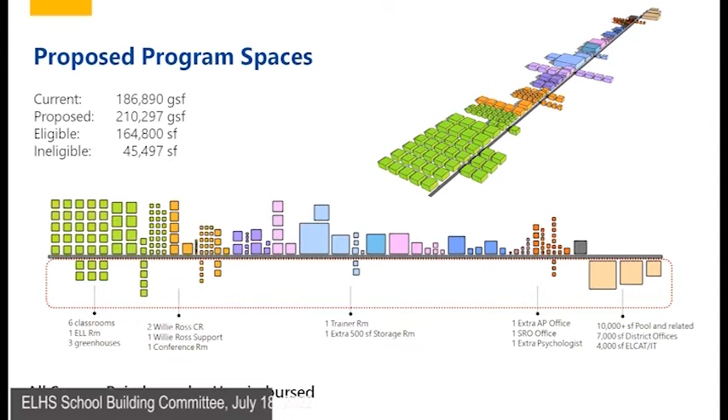And I did realize I missed, we also added a tiny bit to the dining program to allow for a scramble servery, which is a more flexible eating option for students. It tends to engage students in eating more, more people participate in the lunch program if you go with that design. They can kind of move around, it's more their choice.

I think that's what, I don't know about your kids, but my daughter kind of missed that, because she only had it freshman year, being able to go and do the salad bar, kind of have it be more than a la carte. Student-centered dining.

So on the next page, this is not the process of estimating here, this is a process of helping people understand why these numbers matter. So we've circled some of the things that they're probably going to ask us questions about, on the next slide.

So greenhouses we'll probably discuss further. The Willie Ross program, we just need to explain that program. Then there's that question about what to do with the auditorium program. We're looking for feedback from the leadership team on that, and from you all, and they'll shuttle too.

There's the ELCAT studio idea, which we want confirmation is a direction you'd like us to go, to extend the ELCAT programming space so that it's one of the labs, a way to bring it into the academic portion, which might be more reimbursable, but also still have the community aspect of ELCAT.

I think with the way the future's going, like social media and how people create their businesses, drive their businesses, drive their hobbies, drive everything we do, it's all based on media. I don't think it's a bad thing to incorporate it, everything from doing it properly so you don't find yourself in jail, up to being really creative. Our marketing classes need to do more with it, so I think that's an easy avenue for marketing and advertising education. They have entire programs in colleges now for it.

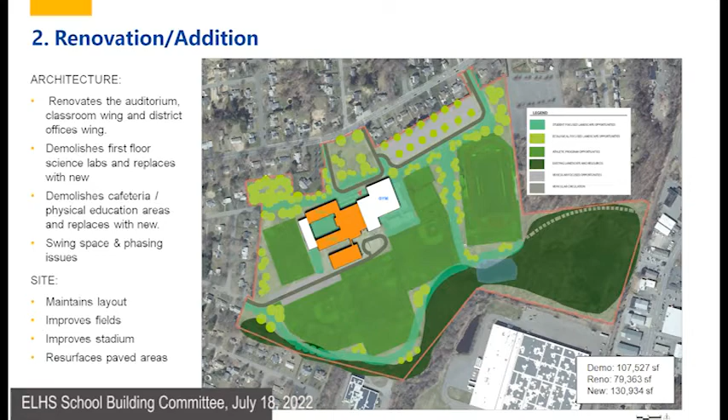As we move forward, are we able to work with the DPW to say we may need better traffic control in terms of lights? Is that something we're obligated as a part of this to do, a traffic study that will look more closely at the specific feeders into the school? And that will eliminate those types of issues, yeah.

So this is new. From our last meeting, we kind of had two areas that we focused on for the new construction. We're calling them the center of the site and the south of the site. So this afternoon, we're presenting two options for the center and two options for the south.

This is kind of the first option for the center. As you can see, it's in an L shape, and a large part of that is so we're around the existing building. It's not shown here, but we basically avoid the footprint of the existing building entirely with this approach. A new main entry, our pods, our classroom wings oriented east-west, again capitalizing on north and south light as much as possible. Gym and pool to the north.

We don't really get into detail here, but we've explored it in a fair amount of detail within the office and then turned that off so as not to distract you and get buried in the details. But we have included square footage for district offices on the north side of that gym pod, closer to the parking, and a two-story classroom wing to the south.

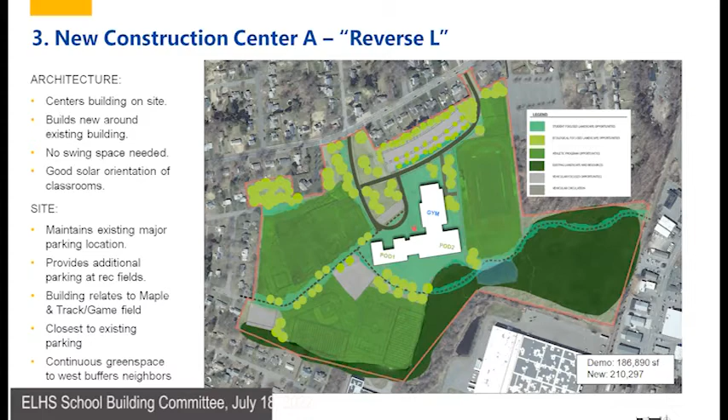On the buses, we have the mini buses coming out for Norden currently, but not for the big buses. We do have staff coming through, with about 10% of staff saying they'd park in the back, though it's very tight and cars fly through there. The challenge we have is meeting both the desire for separation while also having our larger buses going through Marshall. Only the smaller buses come behind the school.

So this is another option, again on the center of the site, avoiding the existing footprint of the building. Comparing option 3 versus option 4, this one is a little bit leggier with more exterior envelope, so maybe a bit more expensive, but it affords a really nice open outdoor courtyard between the school and the existing stadium. We're trying to get the classrooms as close as we can to south and north orientation, breaking up the mass a little more. Otherwise it's fairly similar to the previous option.

Is the parking on the bottom left where Norden comes in? No, not there, the lower one, yes exactly, that's the parking. It would support similar to what's happening along that road now, but gravel there, pulling it together into one spot.

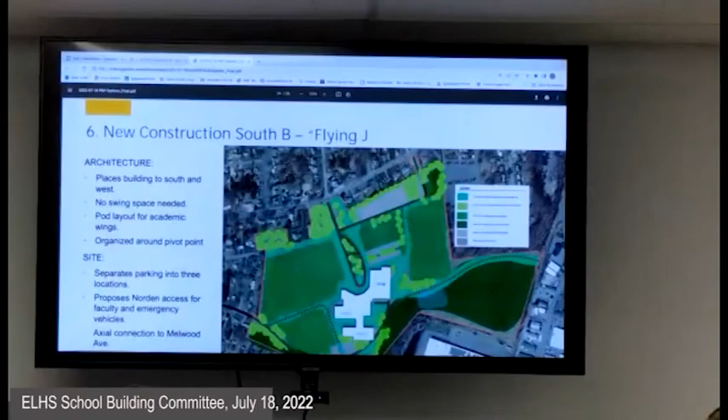I like, yeah. Now, may I ask a question, so up here, right, if that's sort of the central office, could that, if we're thinking community, also be a space for rec?

The rec department? You're talking about potentially bringing that program over here. Not the full thing, well, just possibly. I think we're going way too far in that. I would say a satellite office, but that's a big square footage.

We can't just- hey, what, five people? How many people in rec? Four? Two, three, four. I mean, then you solve access, communication, you solve a lot of.

No, I know, and I understand that, and the usage is important. Right, but I think we're adding square footage that we don't get any reimbursement for. True, so but it solves the space issue because you're opening up. Turn your speakers up too.

You know what I'm saying? Yeah, no, it's a total add-on on top, so I guess what it costs is, I understand. But- $10 million. But does it help the town? We gotta pass this building first.

No, I had thought of that too though, Greg. I had thought of, well, if you put the central office as a rec and community building, ELCAT all together, it almost solves it. It solves a space issue for the town hall, because it opens up space.

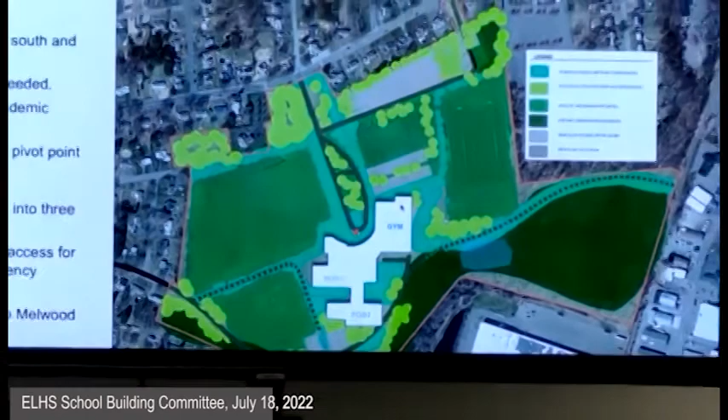So in this plan, is that parking lot where the existing parking lot is? Is that expected for where the students are gonna be, and then they walk up from there? Generally speaking, that was our first thought here, is that students can be asked to walk a little farther than the faculty, rank having its privileges.

No, I understand that. Do you have faculty parking here? So you have two parking spaces, one to the south and one directly to the north. I believe Eric might be able to tell us the counts, but I'm guessing that's probably 200 parking spaces there based on my conversations with Sam, to the one right above.

Eric, do you have a rough idea of these? These aren't finished, but the idea is there's a pretty solid amount of parking there. If we flipped that—and I know these are just preliminary—if we almost move that parking up, as much as I hate to say, where the tennis courts are, and put the tennis courts and the basketball and everything into that back where the arrow is now, would that be neater, cleaner, less kids walking and making paths?

You'd rather bring more parking down and double up some of your lots so you have students and staff right next to each other? Yeah, but then you'd have fields by where those homes are on Maple Street. I'm just thinking it's all in one place.

What costs are gonna get there too, though, because now we're changing the existing parking lot. This has our existing parking lot. It did sound like you needed to do that anyway—there was a capital plan that you needed to change all the drainage on that.

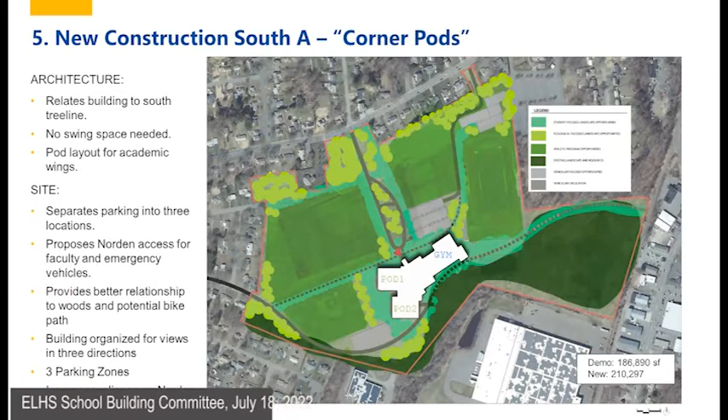Does it? One thing, this one kind of divides the green space up a bit more rather than keeping it all on one side, which is a positive or negative depending on how you look at it. But this gives you a view of the whole campus on the approach. I know a lot of visiting people just can't find anything if they're trying to get to the back office. So this gives you a view of everything as you're approaching, which is nice.

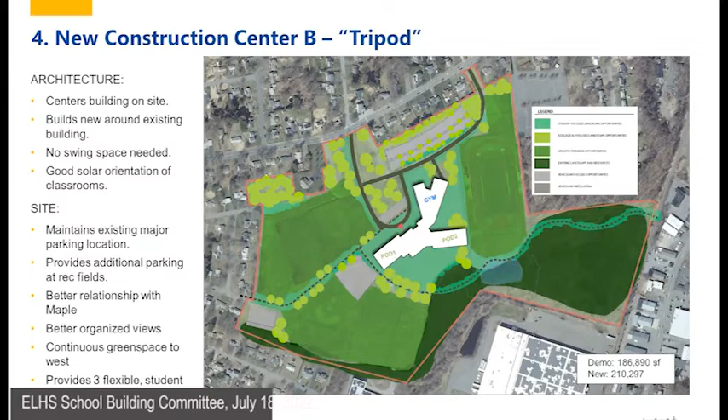What I said to Dory when I saw these two, I said this is the school in the park, because you do have the scope of the site, there's kind of an arrival and a transition.

We definitely want to try and capitalize on the existing large trees near the main entry off of Maple Street, and then some of these are new planting trees. Is that one over by the pool in this plan at all?

That's like one of my favorites. That tree's just like, the rock maple. I was gonna say, if one tree could get saved, there's a big rock maple there, next to the tennis courts. Is that there or is it gone? It's okay if it's gotta go. He said it's staying. That's like the coolest tree, it's like our only shade tree.

Taking notes, Eric. Which one is that, the one by the tennis courts or the one by the bike rack? You know what, it dumps leaves on the tennis courts. It's fine, it's a big one. Now we're getting into the details by the tennis courts. It's okay, that's the least of our problems.

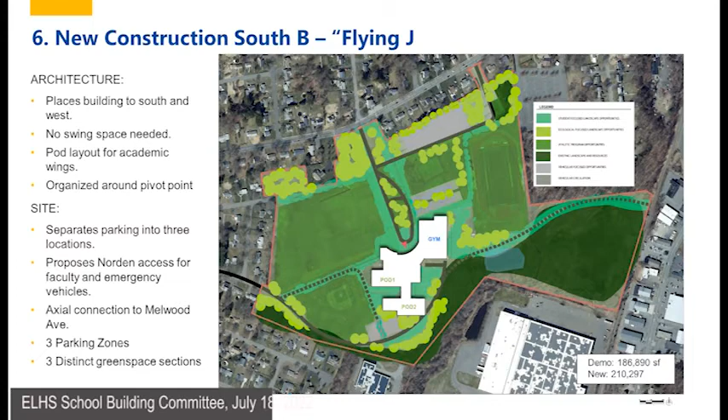She's got a quiz coming up. Here we go, oh nope, there's one more, one more, yeah, seven, go up?

Laps, sauna, nice locker room. A bird's moving in. I got this.

I understand it, but I don't think the pool has to be attached. We have enough trouble getting our students to swim during class, and now you're asking them to walk across. I like the idea, but I don't think it's practical. Even just for wayfinding, trying to find central office, they pull up to the front, now you're gonna have to tell them it's the building way over there.

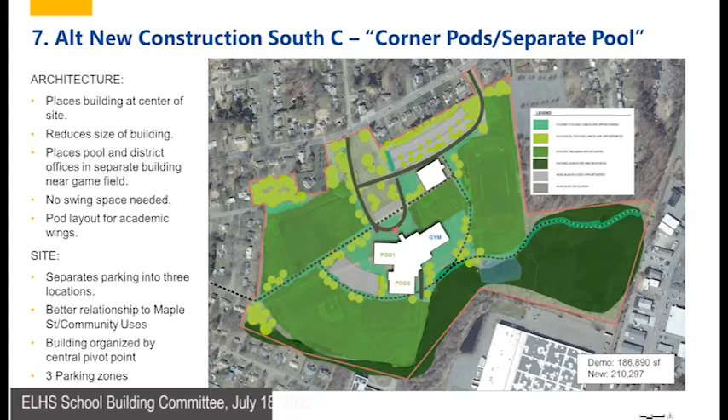They're right next to us in the parking lot. Well, when they come to us first, you have to tell them to go to the high school, which is over there, unless they want to swim. I think the pool park situation needs explaining. All right, next slide.

Everyone wants a health spa, just trying to stay healthy. All I want is a window. You can be up there with the pool.

This is kind of a key that I probably should have placed a little earlier, but just to help you understand why those different greens and what they represent. So the dark green represents the existing landscape resource and more natural areas, versus the athletic program spaces, versus what we think of as ecologically infused landscape around the school, doing healthy things throughout the parking and areas like that, and then student-focused landscapes. We look at these and see which has more opportunities for that.

The center building concepts create more opportunities for space right around the school, potentially, but putting it further south connects to the rail trail and some of that woodland, which is an interesting potential gesture that hasn't been here historically. That could be really interesting. So that was just to share some of that so you understood it.

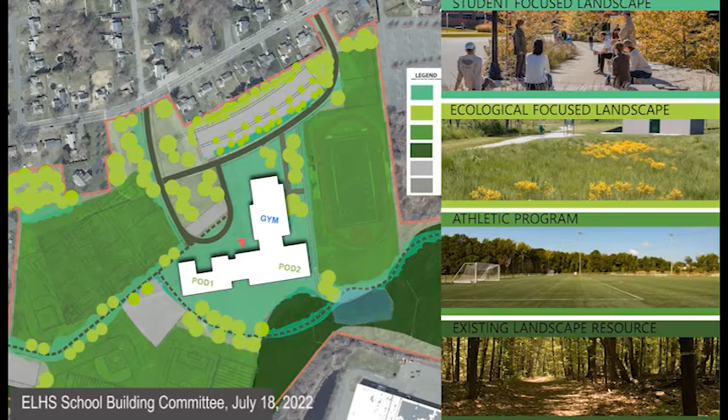We tried not to get over obsessed with confirming routes here, but we were trying to think about the district asking for this separation of traffic, and to the degree possible without making these connections to the community too much of a problem. So this was, to some degree, based on what we're hearing, so we can try and reorient a little bit.

What is each color? I believe the orange was intended to be the bus loop, correct Eric? And the blue is the student loop.

So this one, buses are way up. Yeah, because there's no connection off to the residential. So that avoids that altogether, but it doesn't solve the current situation - it's meant to be quite similar to what we have already in some ways. You still have to route your smaller buses in here.

Well, I think potentially with the entrance/exit being one on Maple, we can put a light there that functions in and out properly, and that would be very advantageous. I don't know if there's room to get a third lane in for a left-hand turn, but that's definitely something that's gonna be needed.

If we can cut into our own space, that would be ideal. I don't know that we can get it. That to me is like one of the biggest things - it sounds stupid, but it's one of the biggest things.

When we transition to this, I honestly don't know how we've never lost a child crossing at that light. I'm proud of every one of them that has survived, because it's difficult - you're coming, there's the turn, these people are coming this way. Just a proper situation there, however you manage it, would be lovely.

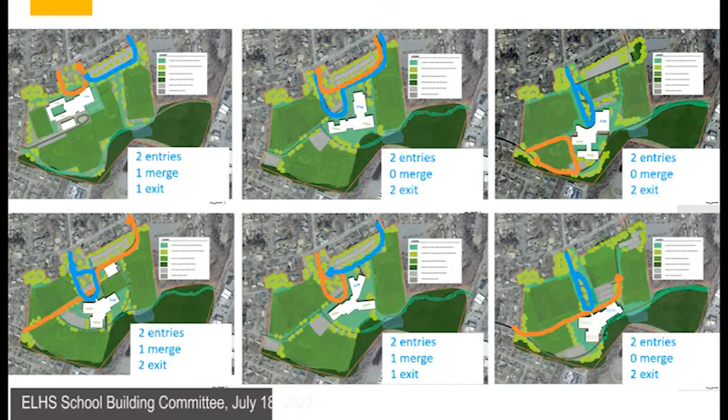Yeah, they come through Norden now, even large ones - our food trucks, all our IT deliveries, waste. That way they don't get caught in the bus traffic, but they don't have to. I like the idea of them not driving around the whole building, which none of them are recommending, I think.

I agree, it depends on when they're coming - you don't want those guys. So that's fine, if it makes sense to come off Norden, then we should do it. Timing wise, you can make that happen. Sounds like either way, because they're coming in that way now.

I think just having more entrances and exits helps to split the traffic up a little better, and especially during the morning and during dismissal, Maple Street's a parking lot, so having that second route is good for the smaller buses and stuff. People are coming back now. So almost we need another loop coming in off the Norden, like a mini horseshoe. I don't know how we do it.

If we bring those little buses in, and the loading dock will, if they bring in a tractor trailer, now they turn around at the very end here, so we'll need that turnaround space. I'm with you, especially not wanting to stick a tractor trailer into the bus route.

It's interesting because that's one reason why where you need that loading dock is interesting in different plans too. I find myself tending to want the loading dock to be on the backside of the gym side of things, so you're not coming off of Norden, but more toward the service between the gym and the field house, so you have more uninterrupted nature around the classrooms and don't have vehicles driving around the classroom areas or the cafeteria, like you currently have.

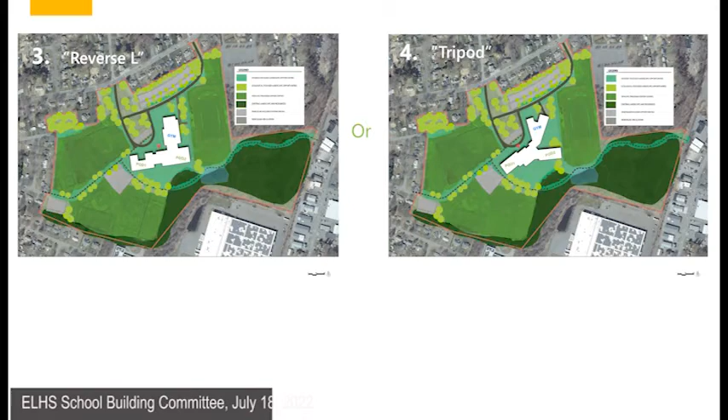I think that we have more opportunity for architecturally appealing design on the Flying J, I would say.

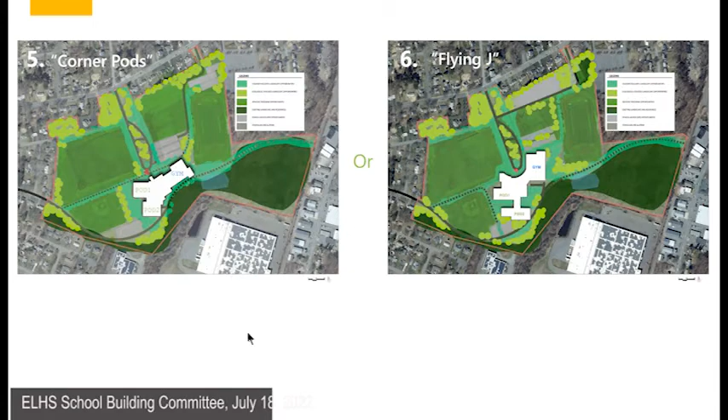As long as that becomes the name of the high school, we might confuse people.

Next one down, so required is the renovation addition. And then, it sounds like we should probably not include the separate pool building.

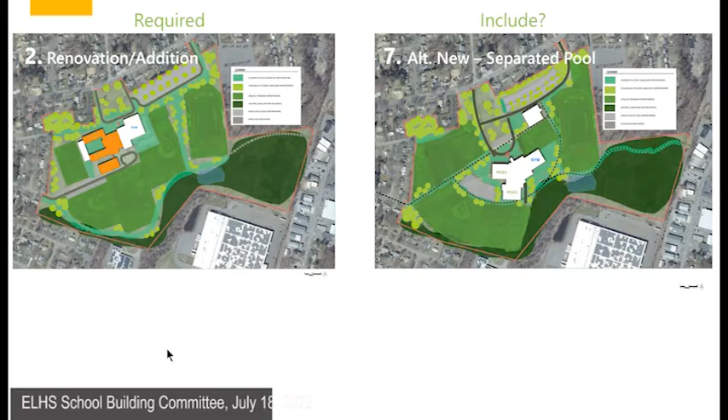Just keep swimming. All right, school tours and student engagement. Today would have been a great day for school tours because that whole parking lot up by my office, or hallway by my office, is completely flooded.

Was it before or after the rain that school tours started? From the rain, yeah, not at this school. This is looking at some of the newer schools around us, keep getting ideas. But that's true, we could. Let's talk about the student engagement first.

So these are a series of suggestions, thoughts. We've had many building committees that have had one, two, or three students on the building committee. It could be a senior because that person has the most experience with the school, or a sophomore or junior because they're going to be with the process for a longer period of time. So we've also put together a student survey.